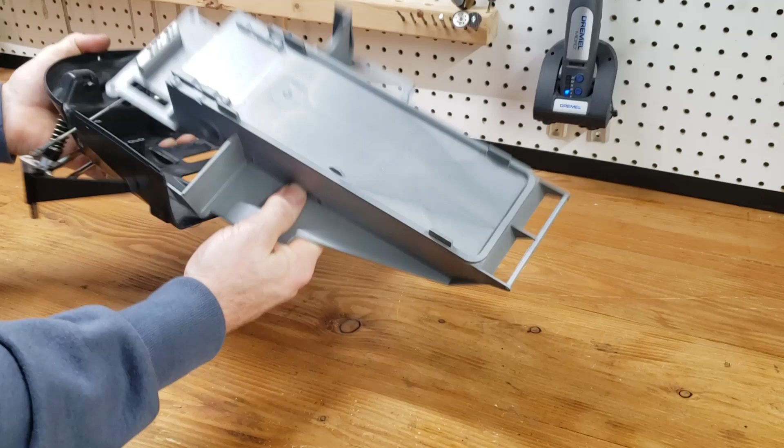It's time we start modifying the mainframe to accommodate the new parts. One of the main modifications, and unfortunately one of the most difficult, is to make some space around the drivers. The tunnel is actually pretty wide from factory, but we can take advantage of it and make an extra wide track without a ton of modifications. The area I have marked in black is the one we need to remove. That feature is there to facilitate the molding process, but we need to take it out now.

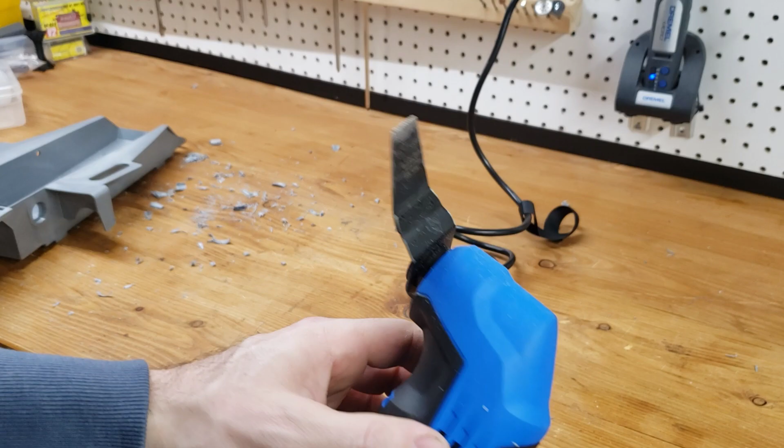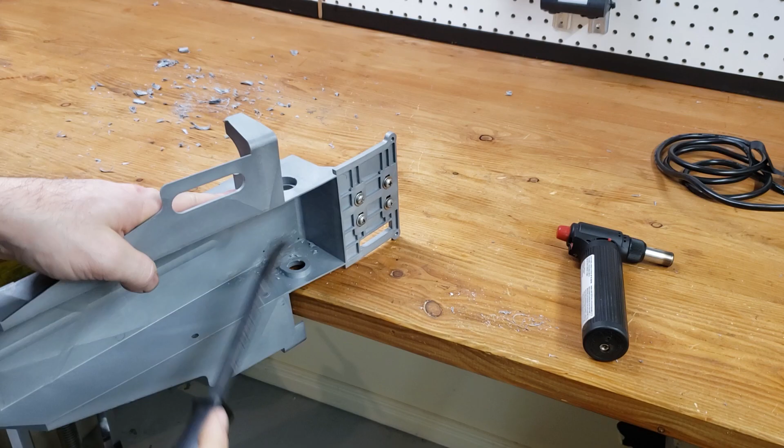The two best tools I have found to make that happen are an oscillating tool and a very sharp bent chisel. You can also use a Dremel. I didn't really have a chisel for this job, so I made one using a pry bar that I sharpened on a belt sander. I also modified the blade on the power tool as it was too wide and had a bad angle for this job. Overall, I think the pry bar did a far better job than the oscillating tool. If you apply a lot of steady force and wiggle it left and right, it will do a nice precise cut. As you can see, I have done one of the two sides and it doesn't leave a perfect finish, but at least no material is in our way now.

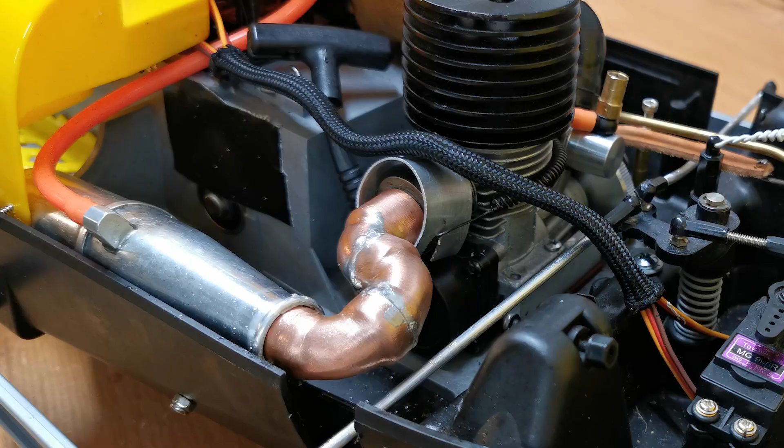Next up, to improve the stiffness of the chassis and increase its durability, we need to install a bar on the frame to stiffen up where the engine sits. I've had a frame in the past that cracked and I had to replace it. That's why I recommend that even if you have the electric version of this machine, that you do this modification.

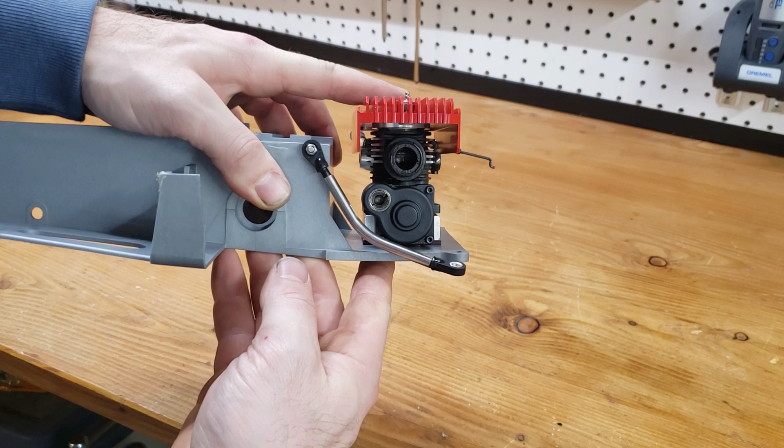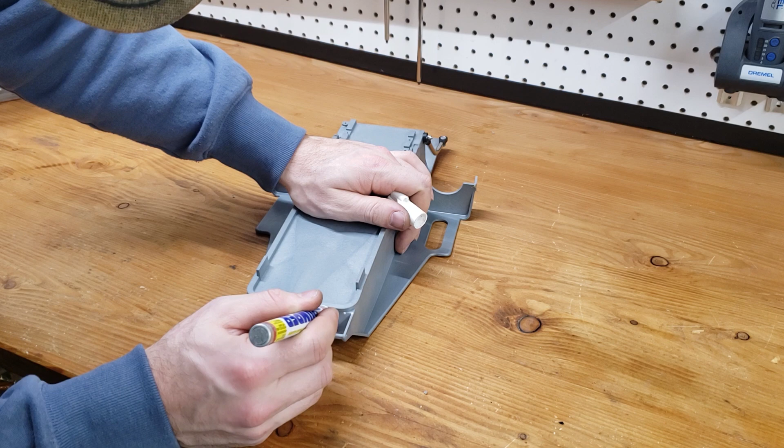And lastly, we need to extend the tunnel, so we can install a new longer skid in it. The original track and skid looks kinda goofy and takes a lot of power to spin. So we are going to replace all of it: the track, the drivers, and the skid.

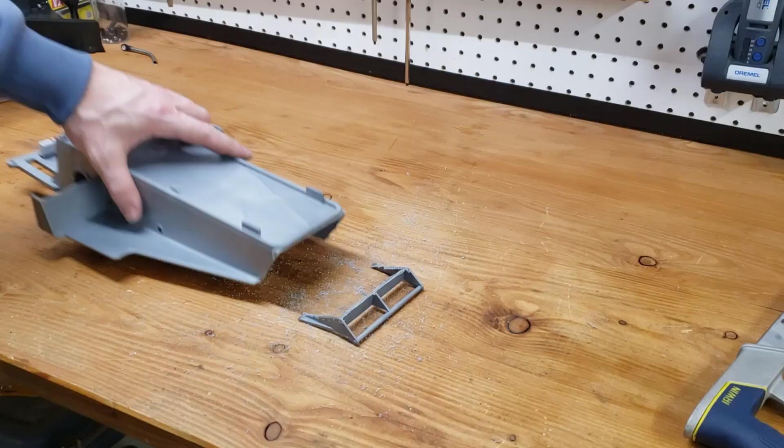Unfortunately, in this video, I forgot how to do the mod, so I cut it in the wrong spot. Big oof. I had to go back and re-glue the pieces and then cut the part again in the right spot.

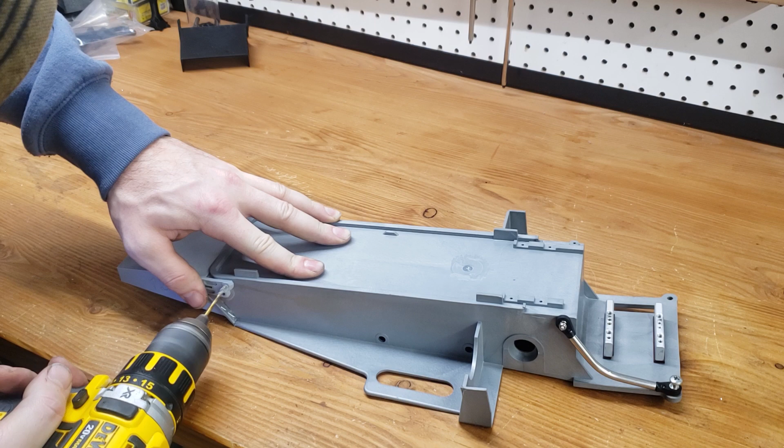Once the epoxy cured, we can finally add a new tunnel piece to it. You then take a drill bit and drill the 4 holes that will fasten the new part to the tunnel. I use a 7/64 drill bit, but you could use a 3/32 bit, followed by an M3 tap. I might come back later and make the holes bigger so I can put some brass inserts in it.

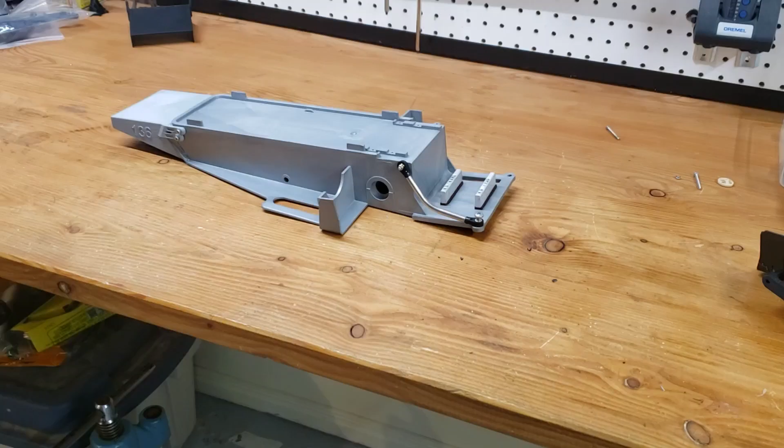4 M3x8 screws later, it's time to test fit the frame on the belly pan. One of the large front screws needs to be longer because we added the brace to it. Lucky for me, I had one the perfect length in my bag of loose screws.

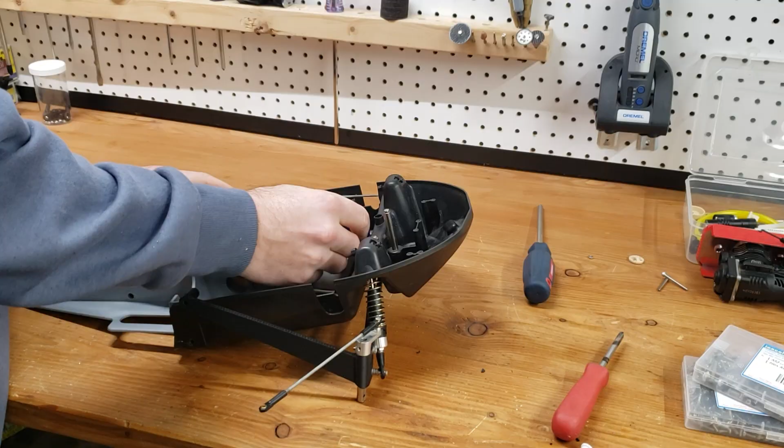In the video, I'm putting thread locker on the nut, but I am aware that we might have to take it on and off a couple times before the final assembly. I then drilled the holes in the frame for the trailing arms and put a long M3 screw, washer, and nylon nut to hold it in.

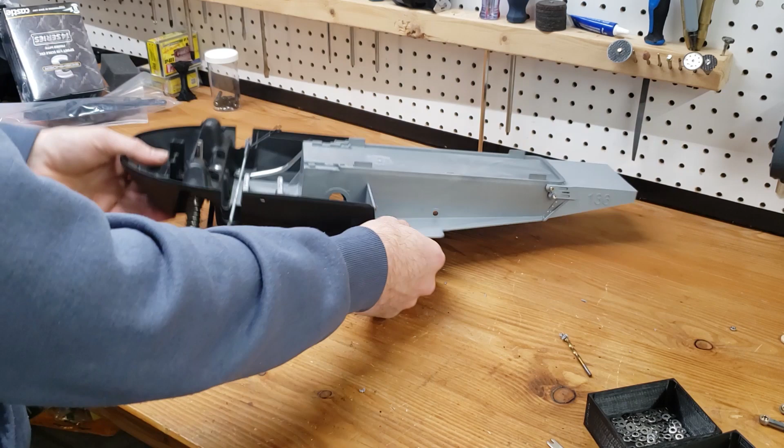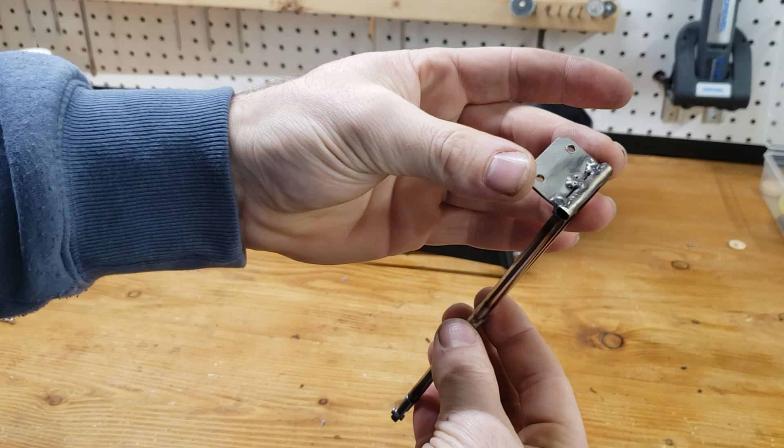Here are the stainless steel trailing arms I teased in the previous video. I am unfortunately not entirely convinced of the look of these, so I decided not to install them yet. But maybe once we have decided on our theme and color scheme, we might put them back on.

Then the last modification on the frame we can do is add the half moon shaped printed piece to cover the old exhaust muffler hole.

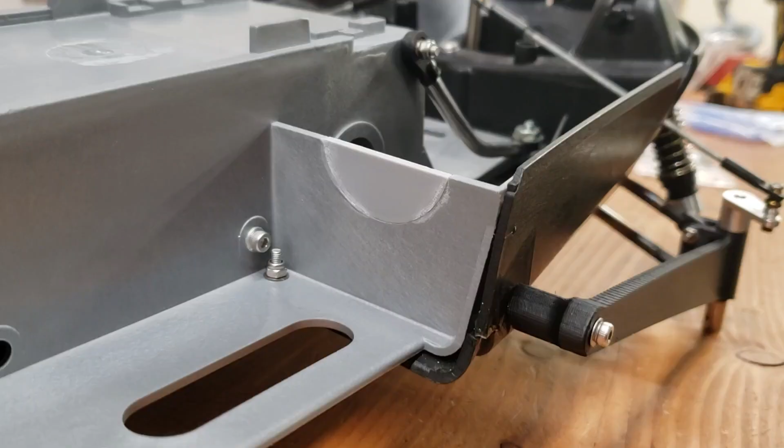As you can see, we've got something very special that just showed up in the mail. I recently asked in the community tab what you guys thought this package was. I hinted that it was something for this machine that I think has never been done before.

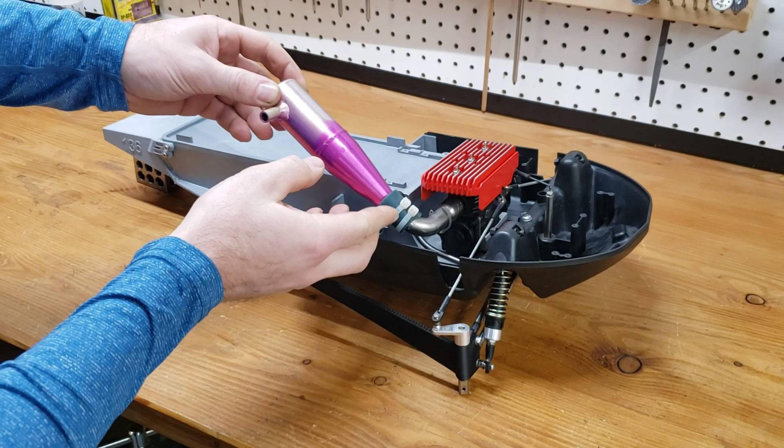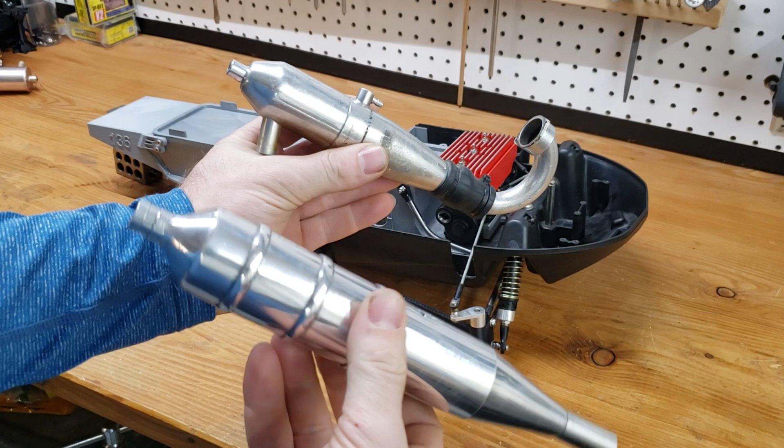Easier said than done. There's a lot of science and research that goes into making those little expansion pipes. Making one that achieves peak performance is extremely difficult. Lucky for me, there are plenty of videos online explaining how to build one. I also had a few pipes here that I could take measurements from, so I know I'm not too far off. So brace yourself, it's about to get real technical.

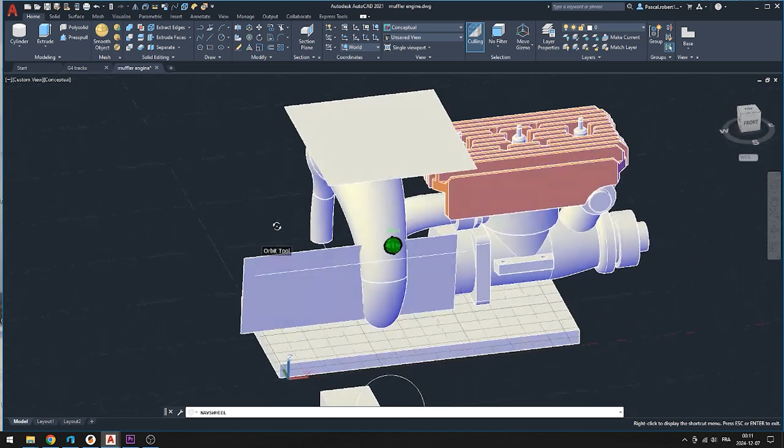So I started in AutoCAD with a flat pipe. I put in a couple of measurements, and once I was satisfied, it was time to make it 3D. You can measure the distance from the port to tell you what the diameter of the pipe should be at what point. But the main problem showed its face: the pipe needs to fit inside the body. With the space I have allowed inside the snowmobile, I don't have a ton of options.

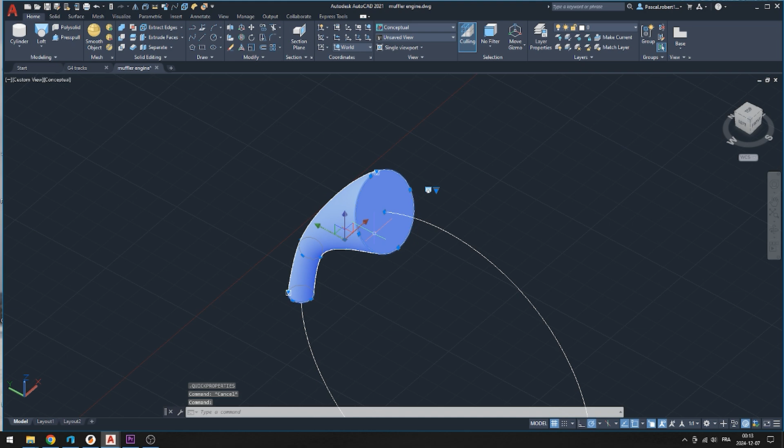I used the loft function in AutoCAD to make the shapes I need. I decided to do multiple small sections, so if I need to rotate one or the other to make some space, it's easier than with one large piece. Once the rough outline was done, I exploded the part into its component objects. You end up with a bunch of surfaces, then you can use the thicken function to convert a surface into a 3D solid with a specified thickness.

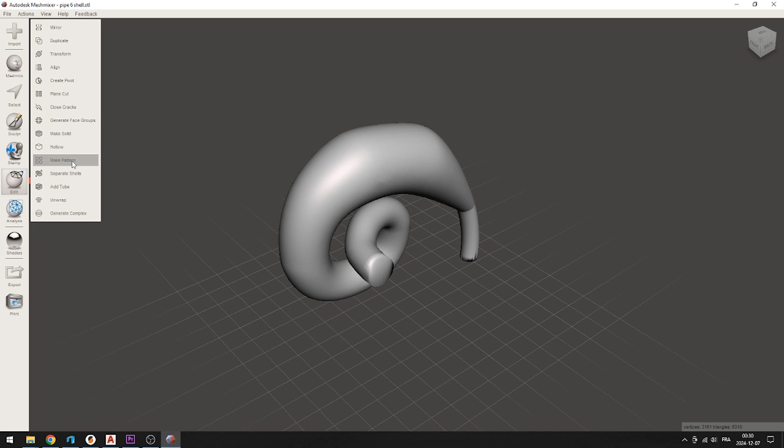I must have made 10 or so tests before I had a pipe that looked good and fit inside the body. To try to keep the weight down, I wanted a thin shell with external webbing to add some strength. The first one has triangle webbing. I'm using Meshmixer for this. I basically exported a smooth pipe and had the software explode every edge about 1 millimeter. I then fused the skeletonized version of this with the smooth one to get this look. It's a bit sketchy, but it works.

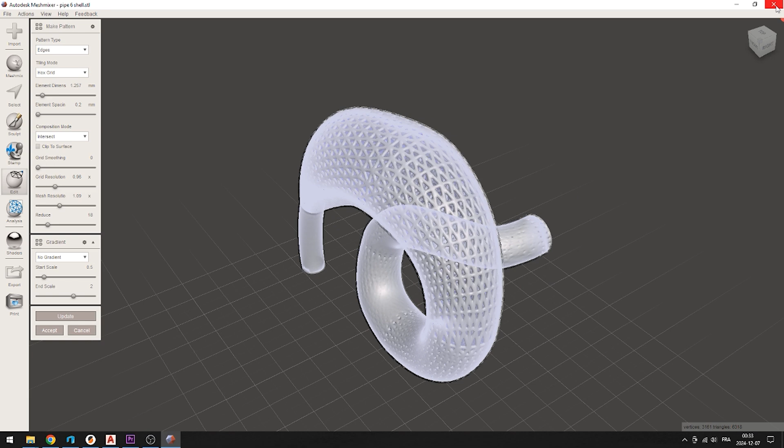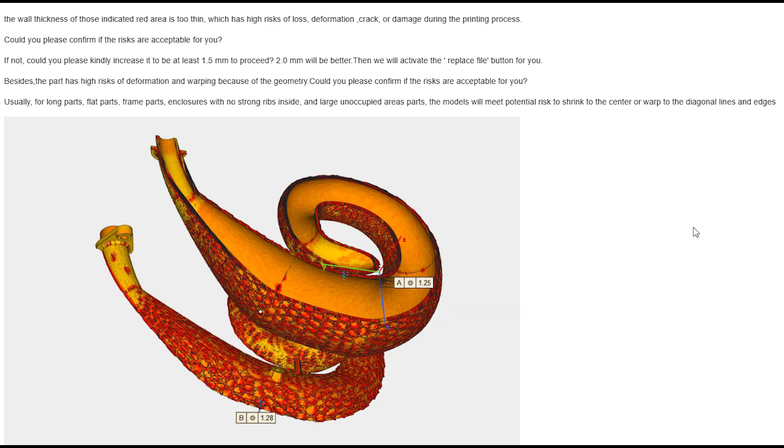I did the same thing with the second pipe, but this one with the pattern type dual edges, which ended up making hexagon-like shapes. The hex one is a bit lighter, maybe 5 or 10% lighter, but it had a really weird organic look, and I wasn't sure how that would turn out in person. The engineers at JLCPCB were not too sure about that design, as it's very thin. So I went back in and made the pipe thicker and smooth again. This ended up being 50 grams heavier, but at least I know this will work well.

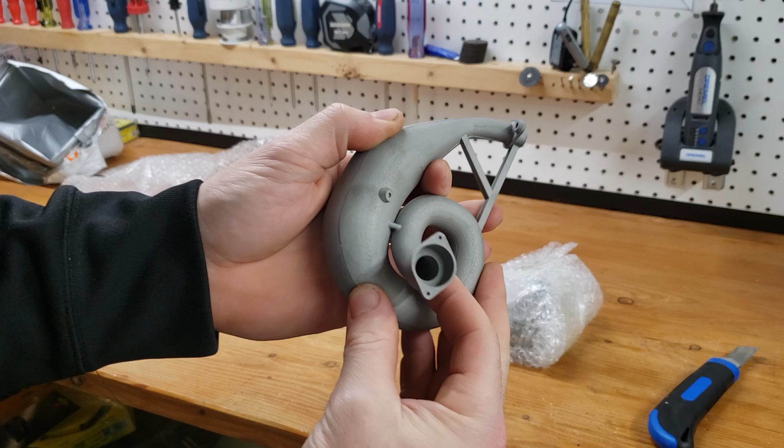I then exported the STL to JLCPCB, and 2 weeks later, this beautiful box showed up. The part is surprisingly smooth both inside and outside. I had to split it into 2 pieces as they needed some support inside and wouldn't have been able to remove them otherwise. It looks really clean inside, and I think the pipe will perform well.

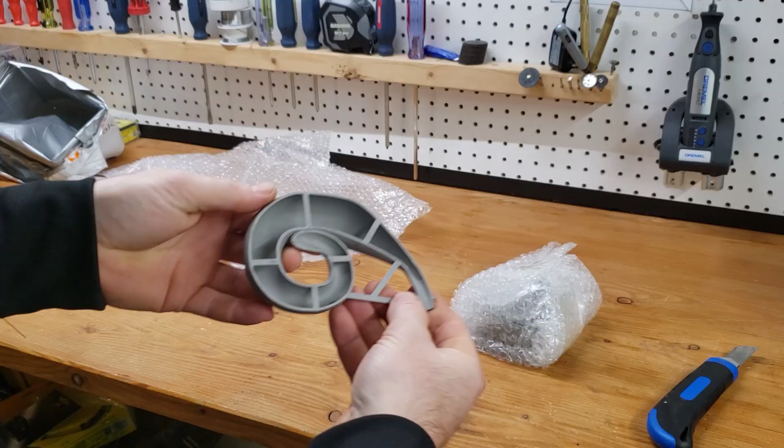I was worried that the part might warp during the build process, so I added extra pieces to stabilize it. Before I reattach the 2 halves together, I need to remove those. This time, let's get the Dremel out.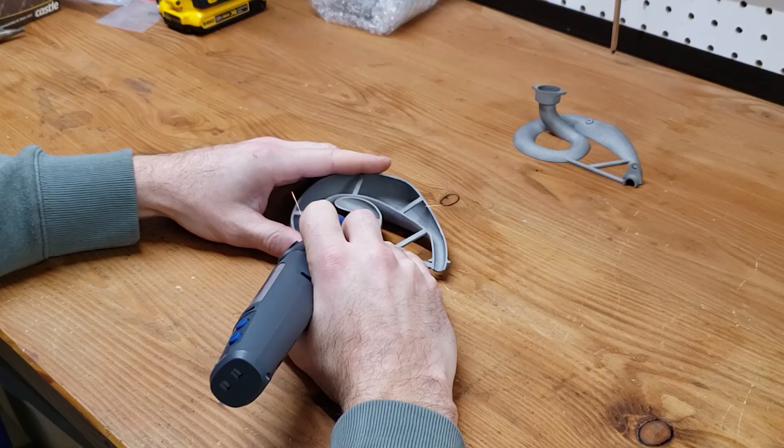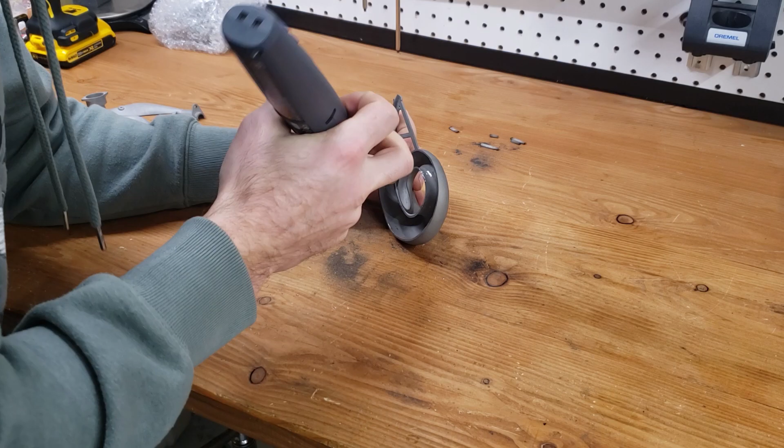I took my time and made sure everything was perfect and as smooth as possible on the inside, to give me the highest chance of having a high performance pipe. It looked really good once I was done.

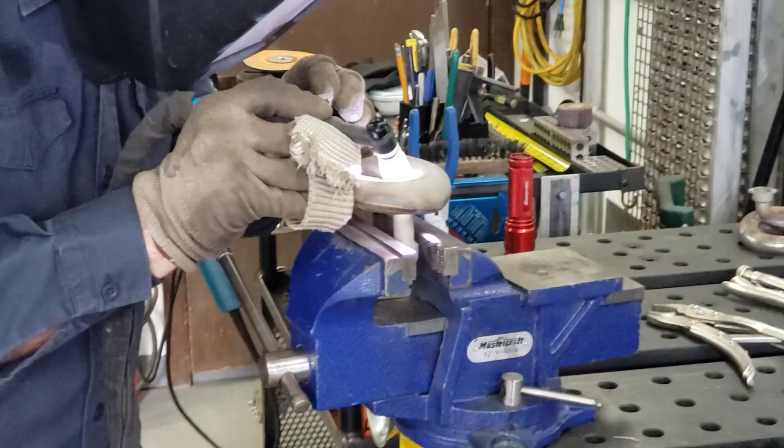I chose to go with a professional welder to weld the 2 halves together, as I thought this material might be porous and would have behaved weirdly compared to regular stainless steel. So I went to my friend Dave to fuse these 2 parts together. He said the part felt like regular stainless steel, so it wasn't too difficult to pull it off.

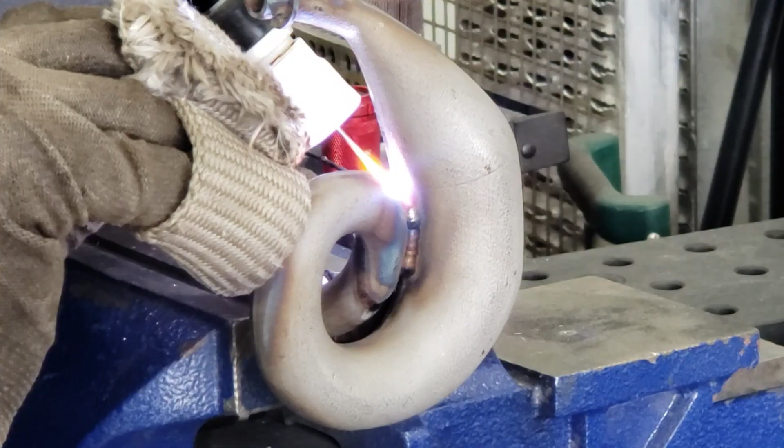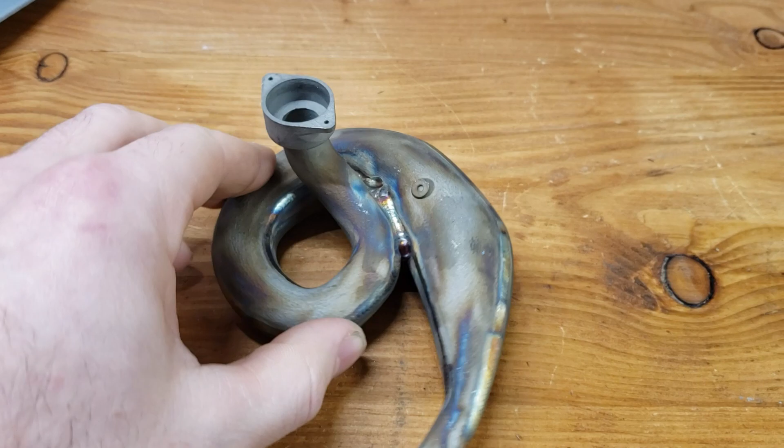Now the question I'm asking myself is, should I go with a special coating on it, such as ceramic coating, or should I have it bare like this? Maybe a chrome coating? What about high heat paint?

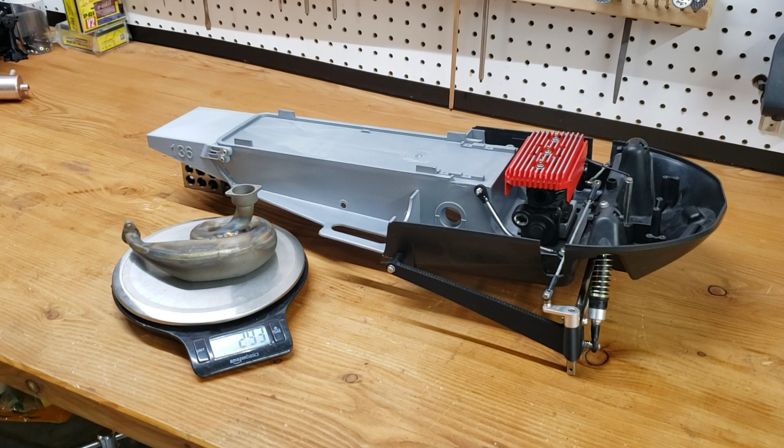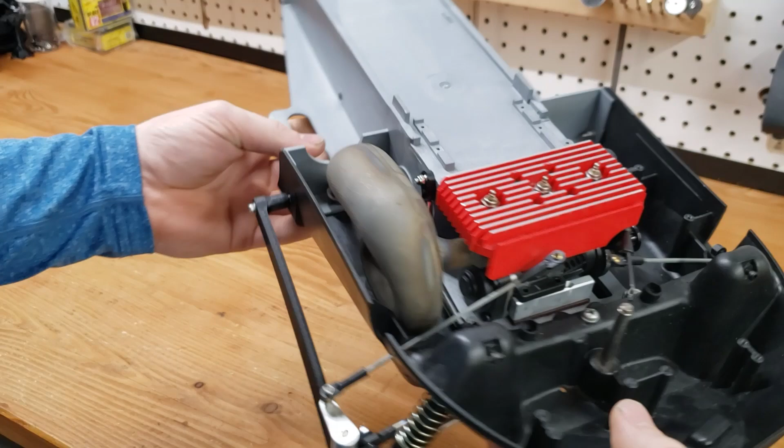The pipe seems to really blend in with the rest of the sled. It takes very little space and will allow us to work on the rest of the system without it being in the way.

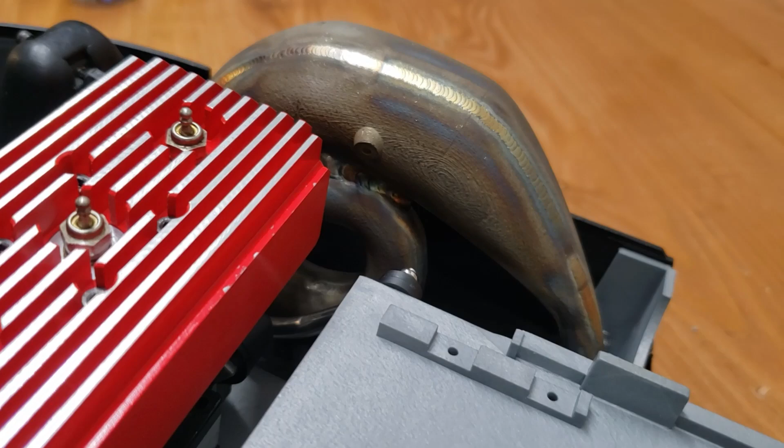Next step, let's work on the fuel tank. I thought about it long and wide, and although there was some simpler solution, I probably ended up with the most difficult one. I wanted a fuel tank that had a filler neck at the top so you can easily fill it up without having an external pump.

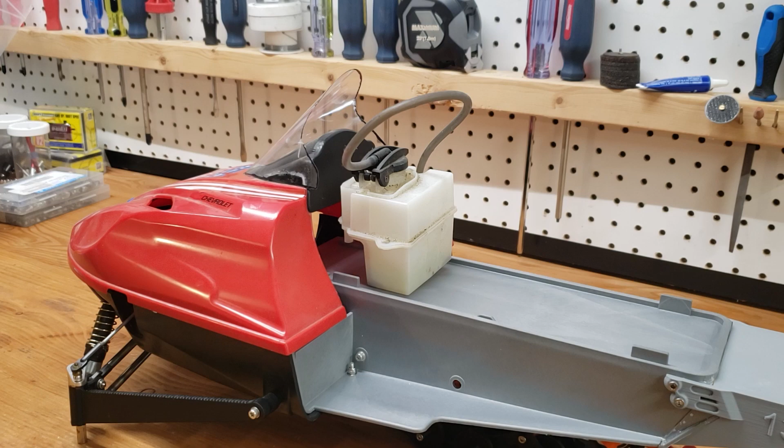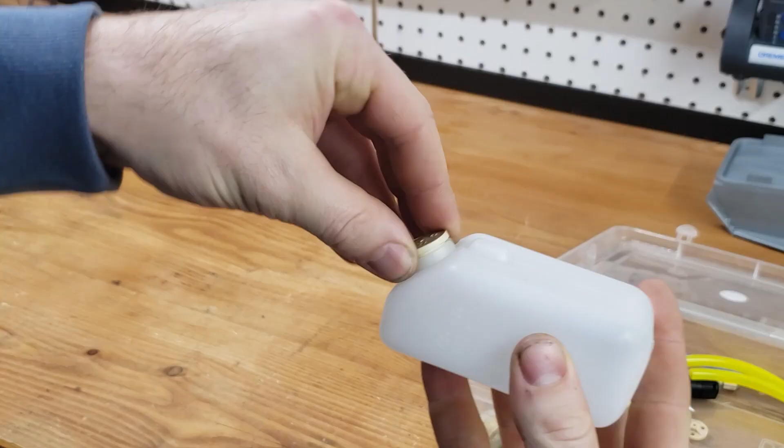But all the fuel tanks that I saw were either not in the right shape or had a pivot cap on them instead of a screw-in cap. So once again I decided I was gonna make my own, because for some reason I like to make my own life difficult. I considered having a little 2-ounce metal flask that I could weld to another little fuel tank or another flask, but then it dawned on me that you wouldn't be able to easily see the fuel in it. So I went back to a traditional Sullivan fuel tank.

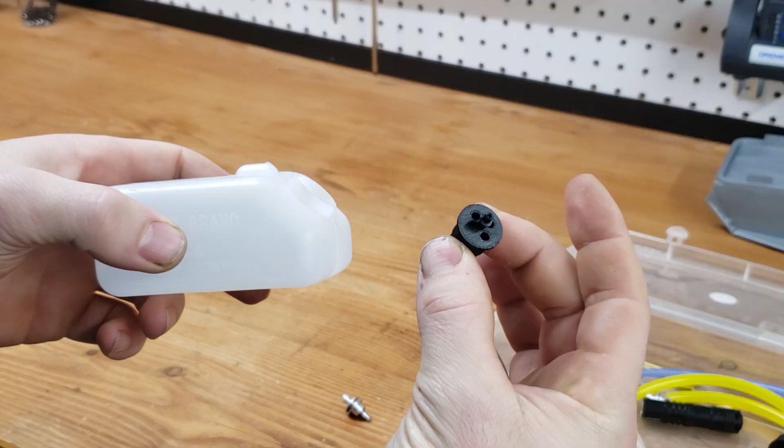But I still wanted the fuel cap. So I machined down a little AAA battery flashlight and added a plastic top to it. I then designed the most complex part I have ever machined on a lathe that would plunge inside the fuel tank and seal it from underneath. It would also have all the nipples that would come out of that part. And then I immediately regretted it and scrapped the entire idea.

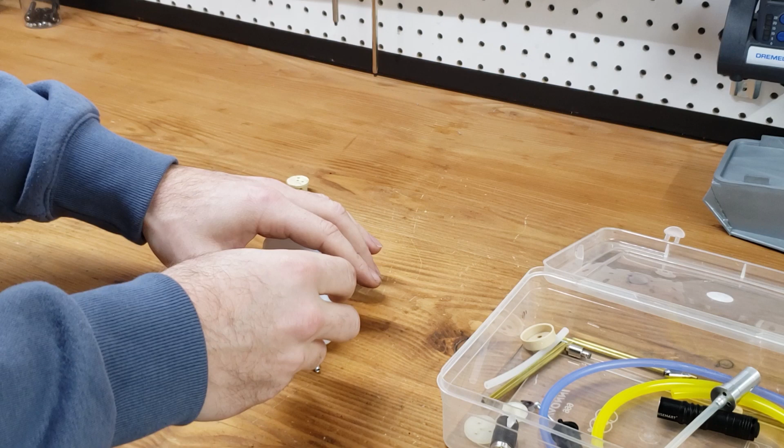Why am I making my life so incredibly difficult for seemingly no reason? I decided to simply have one filler neck go through that silicone seal and have 2 additional nipples all the way to the bottom of the tank for the fuel and the pressure. But then I still needed 2 new nipples with a barb on both sides, and as far as I could see, that didn't exist. Sullivan makes one, but it only has 1 barb, so I had to once again machine one on the lathe. They came out nice though.

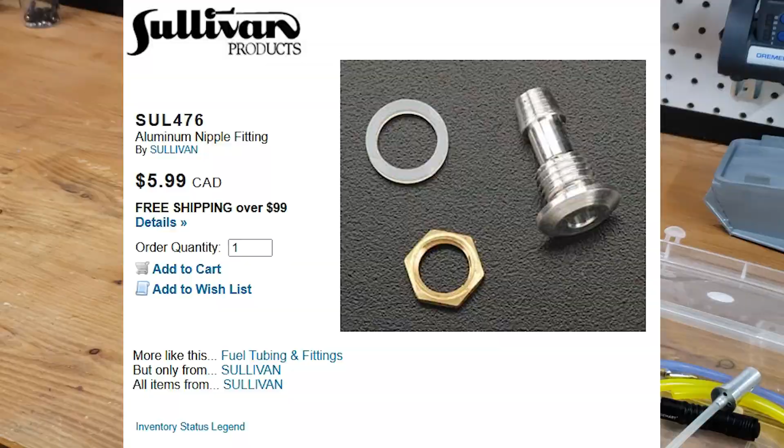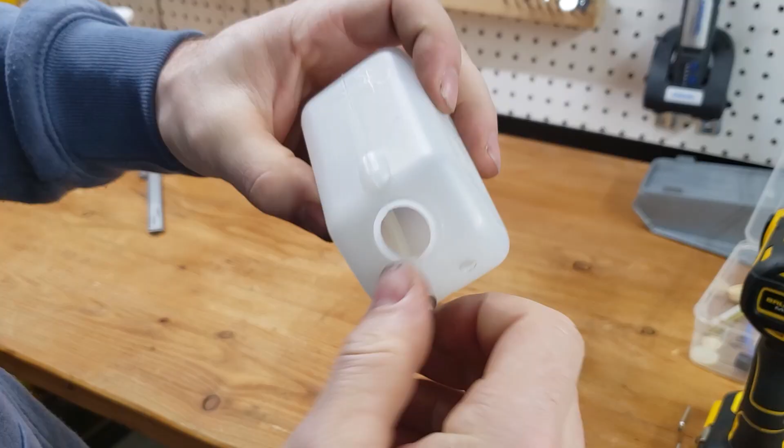I then got Tygon tubing and sliced 2 small discs that would be used to seal against the tank. I then did the exact same thing for the vent tube.

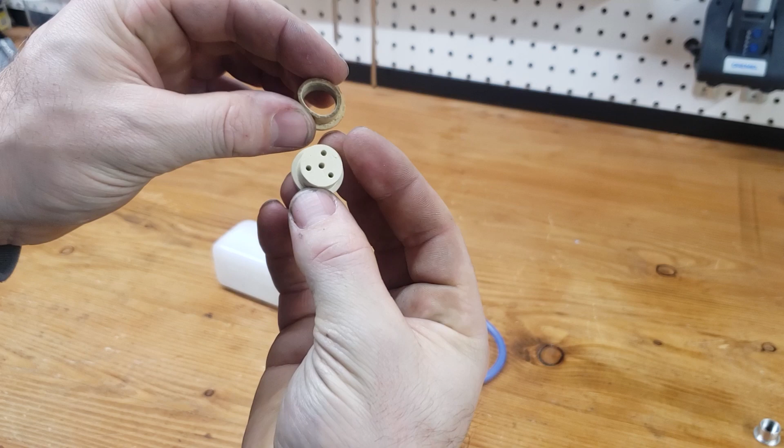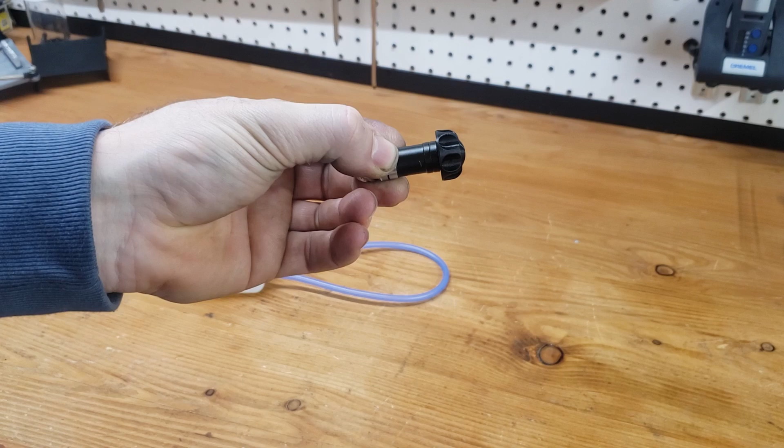Next up, the filler neck. I enlarged a hole in it and made an inside nut that pushes against the plastic tank. I then machined yet another part that screws into it, and I welded the flashlight core to it. Welding those 2 pieces together was not easy as both of them are very thin. And with that part finally welded, we finally have everything we need to fully assemble that fuel tank.

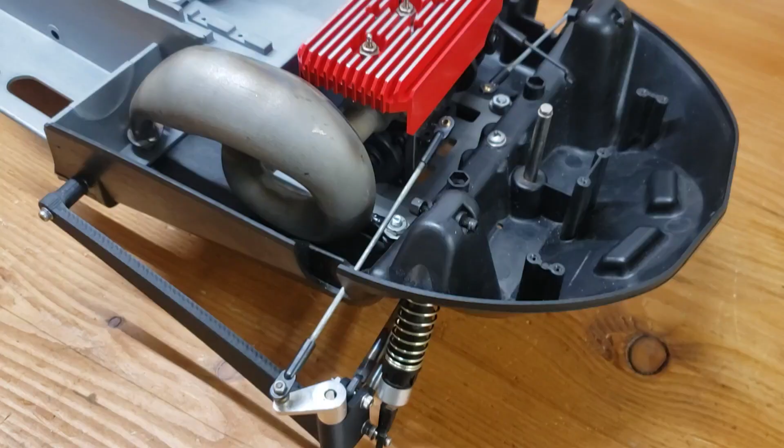That came out nice. All there's going to be left to do is blend the tank into the rest of the seat, install it, and then we'll have a complete fuel system. But that's going to be for the next video. I feel like we've accomplished quite a bit of work today, so I will see you in the next part.